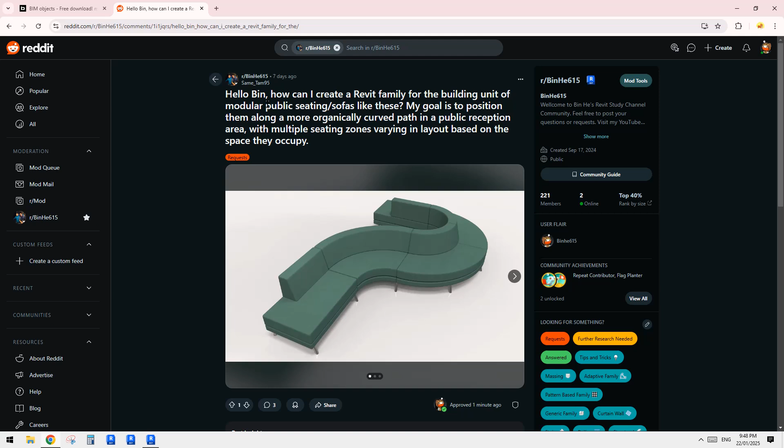So today we are going to have a look at how I can create a Revit family for the building modular.

Usually, I don't think we need to model these because you can always find this type of Revit file from manufacturers. Basically, I just did a quick search, so if you try to search for furniture and modular, you can find this type, and then you can just download them and put them together, and you will have this.

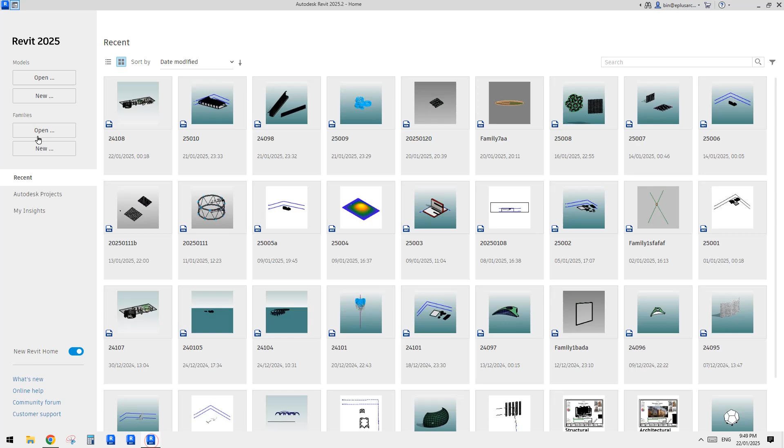It's also very easy to model, so I'll just very quickly show. What type of furniture, right?

I think you can either use a sweep, or I think we can just use sweep. For example, you can do a sweep, just do a sketch. Usually for those it looks like 45 degrees, because you can have two together become 90 degrees, four together become 180 degrees.

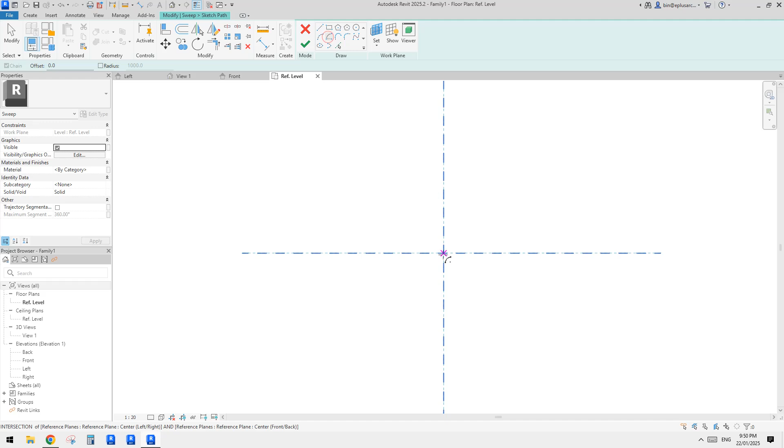So you can just do a center-ends arc, and then roughly get some dimension, 45 degrees, or just type in 45, and then finish, go edit profile.

So I just go to 3D view, and let's go to default 3D view. Let's rotate a little bit. Where am I? Where is it? I can't really see. Maybe I just go to front view. Okay, so that's the profile.

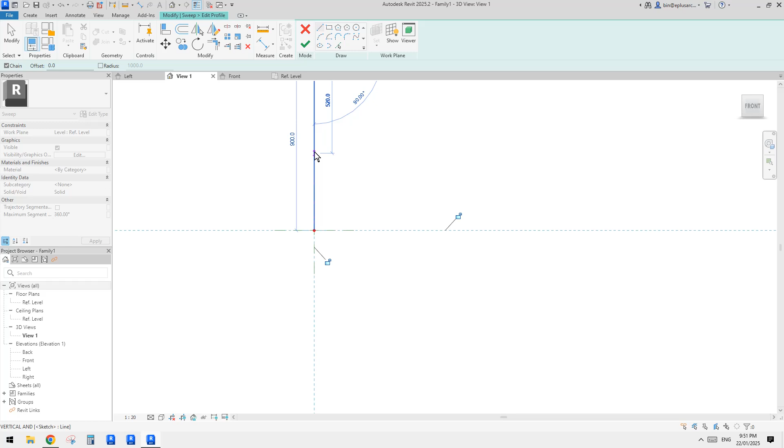And then you just draw something like 900, so I'll just do a very, very simple one. Maybe 450, 600, 700, 750, and then go up 450, go here maybe 600, go up something like this, so maybe I'll just make it 200.

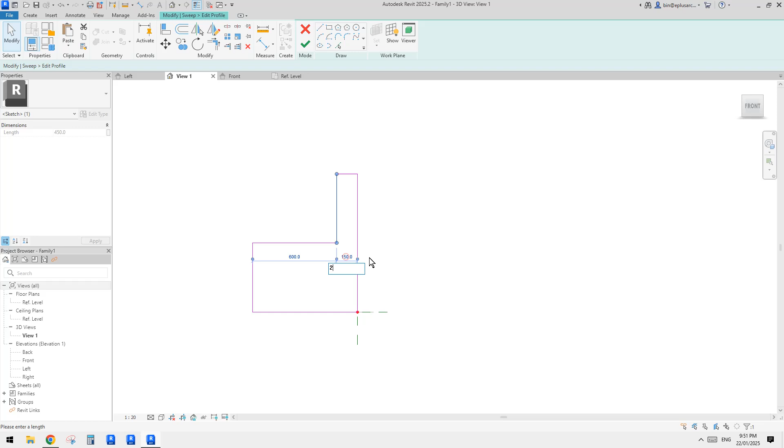And then you can always fillet all these corners, something like that. Don't worry too much about it.

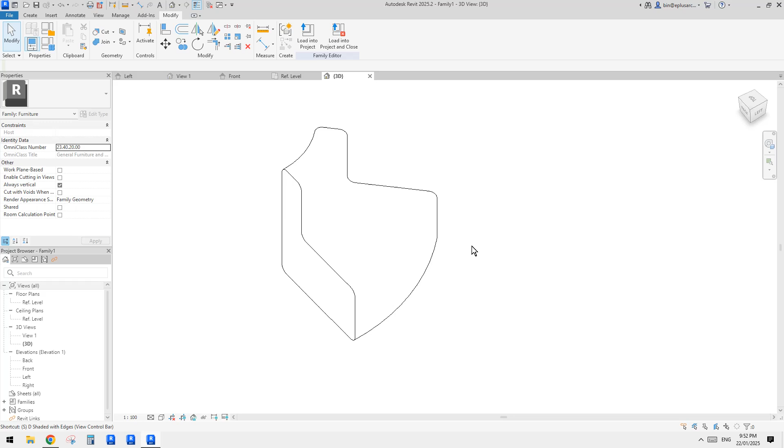Okay, and then let's go to 3D view, so we have one, right? And then you can do the same to the other direction. I'll change the shade. So this is one, and then you can also give different materials, so you can place them together to create something like this.

So this is one of the options, but I will probably not model them. I will try to find a product somewhere, download them, put them together, so we can create some nice seating layout.

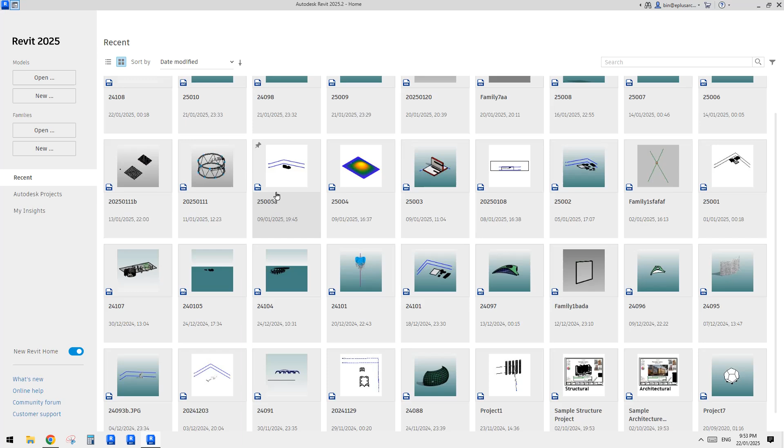But what I'm going to talk about today is, what if the shape is more complicated than this, like a very organic curve? We can create a family to place the whole set just by clicking 1, 2, 3, 4, maybe 5 few points, and that's all we need to do.

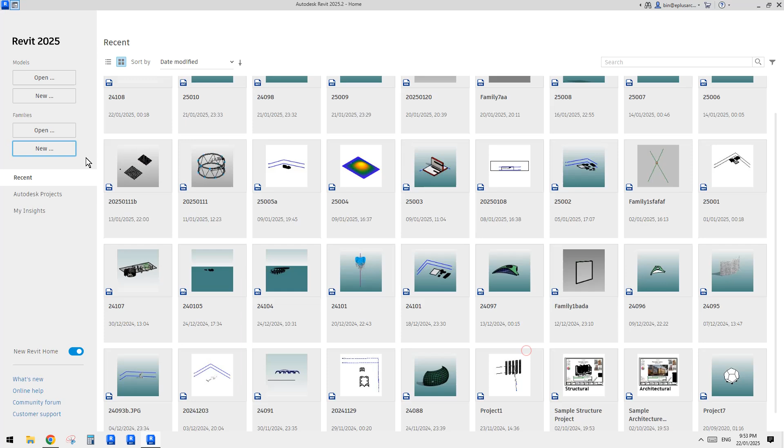So to do that, we need to create an adaptive family. Let's just quickly do it. For this one, maybe I'll just place 4 points and make adaptive. You can have more if you want, or the minimum is 3.

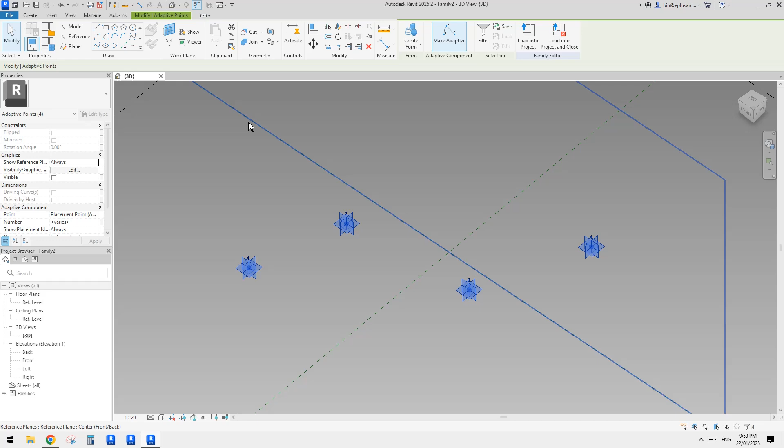You can also have 2, but if you want a straight line. Usually you need more if you want some interesting shape. So this will be the spline through points, and then let's make it adaptive.

And then we need to just use divided path. With this one, instead of using a fixed number, we're going to use fixed distance, or maybe we should probably use maximum distance, because if I use fixed distance, there might be a smaller one at one end, which I don't think we want.

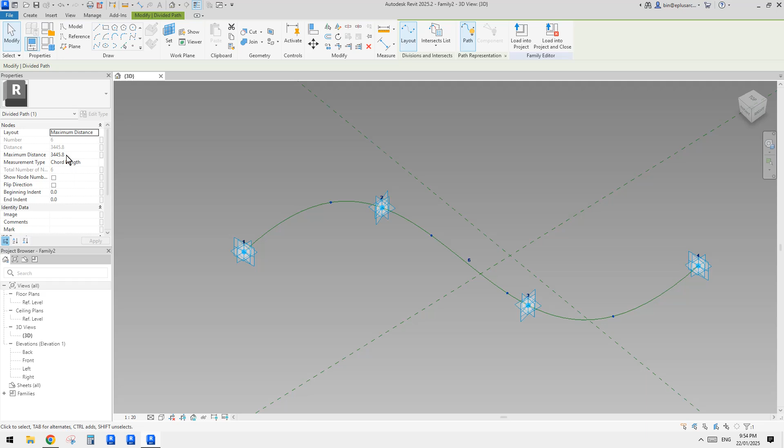So we're going to use maximum distance. Revit will automatically find a maximum distance, but we can also set this. For example, I'll just type in 900, and it will automatically place all these nodes and distances. You can either use a chord length, which is the direct distance from node to node, or use segment length, which is the length on this reference line.

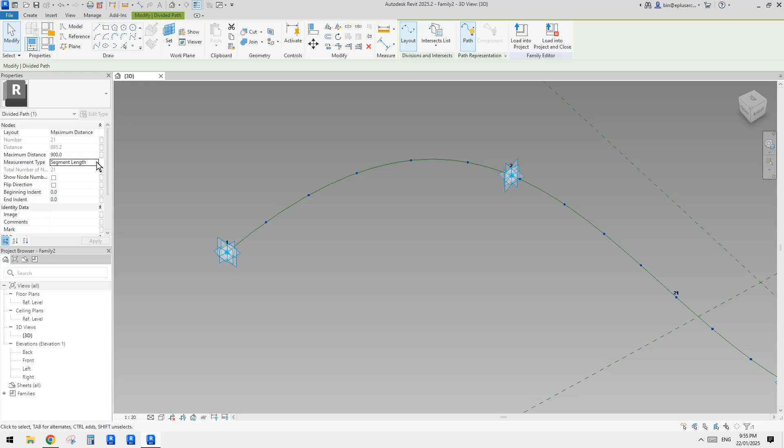Okay, so the length of this curved, so chord length is a straight line. So with this one, let me just move them together a little bit, so I don't want to make it too many. So now we have this, we have 9, and then we are going to create another adaptive family that will create something like this. Just one segment, and then we can place it onto this divided path.

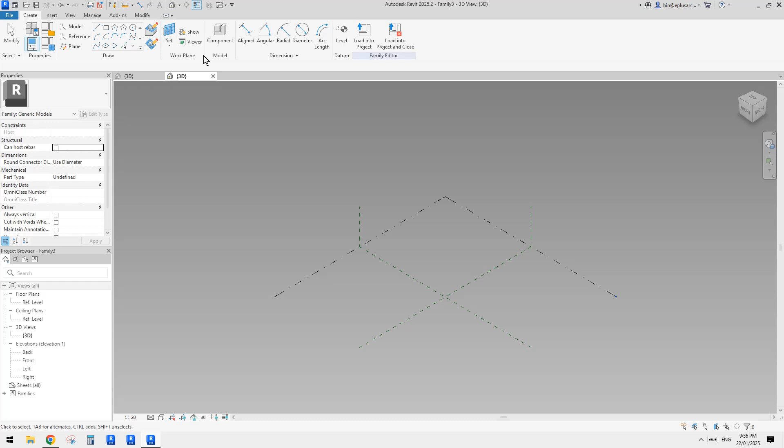Let's do another one, family, generic model, adaptive. In this one we need to place 2 adaptive points. Make them adaptive, create a spline through points, make it reference line, and then place a point, use draw on face onto this.

Now we need to set a gap. Imagine, when we place this family onto this divided surface, divided path, we want there to be a gap between. So for example, there's one here and another one here, so there needs to be a gap.

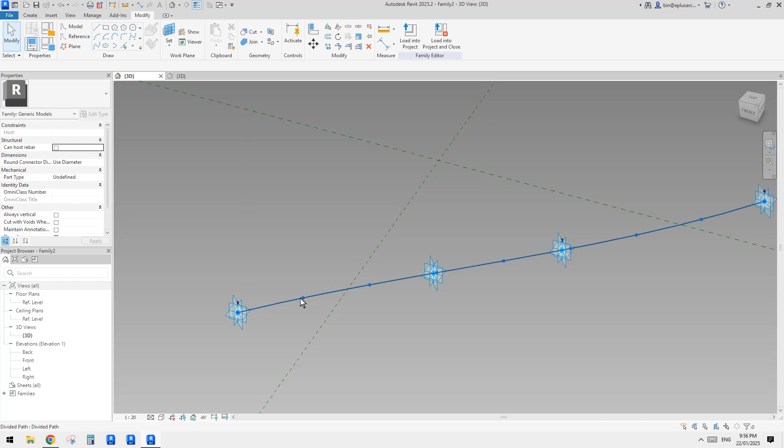So in this family, we need to place this point just close to this one, but let's use segment length for this one, and use this one. So this is the distance from here to here, the length of this line, but in this case, because it's a straight line, it doesn't matter, it's the same.

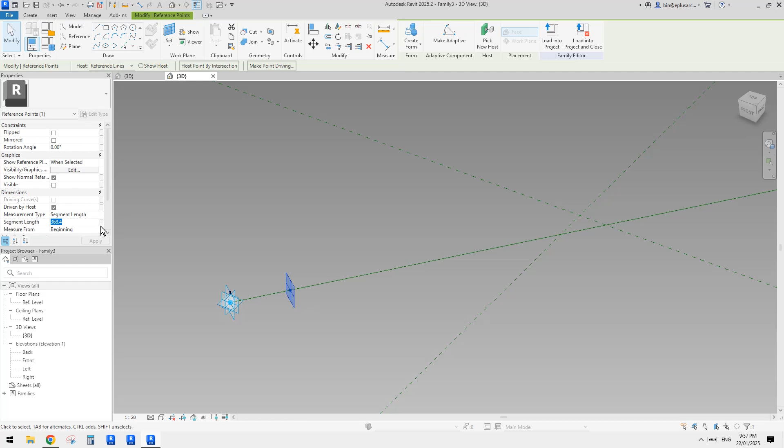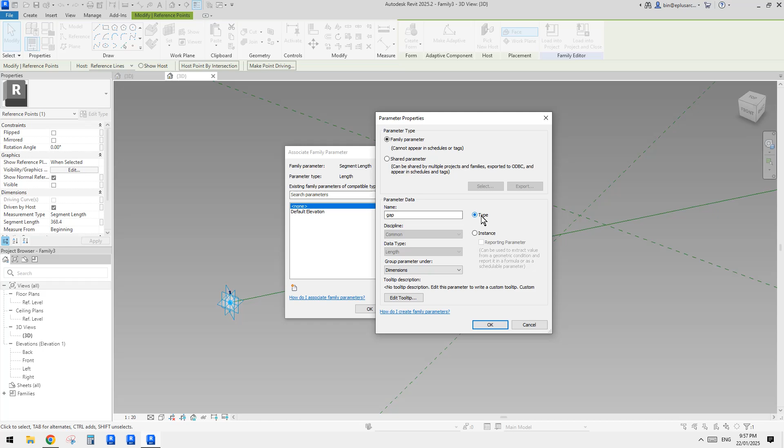So we can give it, we can actually control it, we can create a parameter. I'll just call it a gap. Actually it will be half of the gap, because we have one on this end, and then when we place another family on the other end, it will be another. But I'll just call it gap, doesn't really matter too much.

So I'll just type, it will be fine. So we can control this one. Let's say maybe 20 mil gap, or maybe 10 mil gap. Apply. So this point will be placed at 10 mil from that point. Maybe I'll also move this closer to here, and maybe change the scale to just leave it.

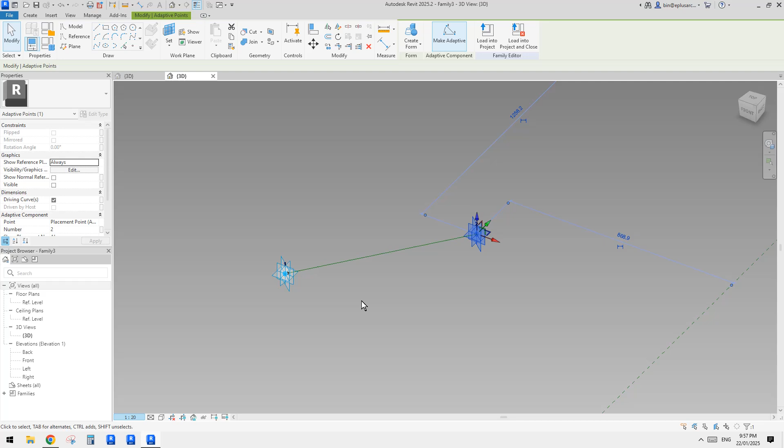So we have this one here, and I'll just place another one. I'll copy the point, pick new host, or you can just directly place another point to draw on face. Again, this one flip measures from this end, change this one to segment length, or use the same parameter. Let's use that gap. So now we have these two.

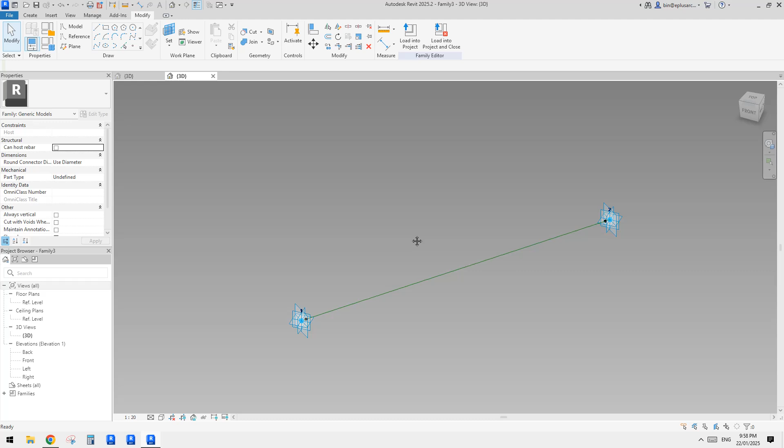Actually, maybe it's easier to delete this one, because once we create a profile, we can copy it, so we don't need to create the profiles twice. So let's now create a profile.

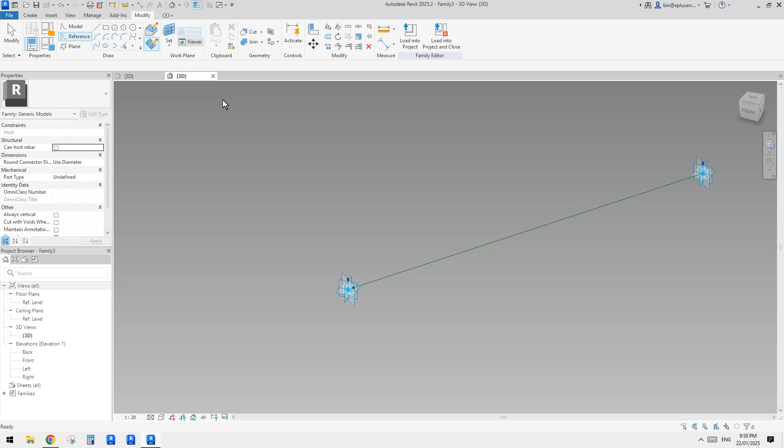For this one, let's use reference line, use draw on work plane, set work plane, pick this vertical work plane on this point. Now this is up to you. You can draw this profile centered to this point, or you can use this point as the back, or use the front as a front. But for this one, I'll probably just use this as a center point.

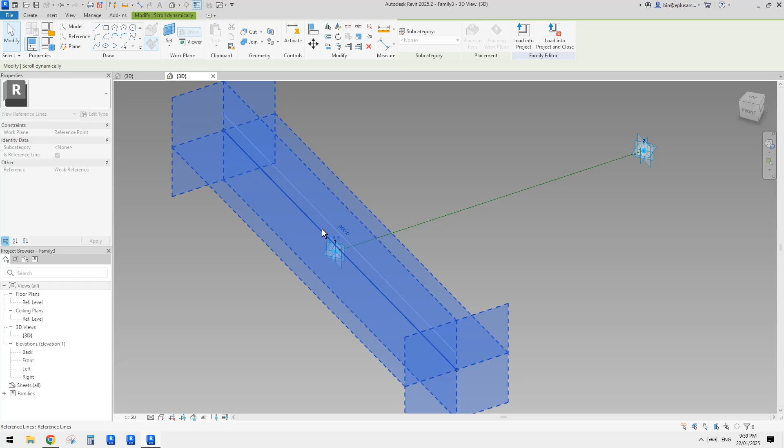Okay, I guess I'll just type 450 here. Now we have this line, right? I'll just make a reference line, and drag this and type in 900. So now we have a 900 line, reference line on this point, and then we can just continue.

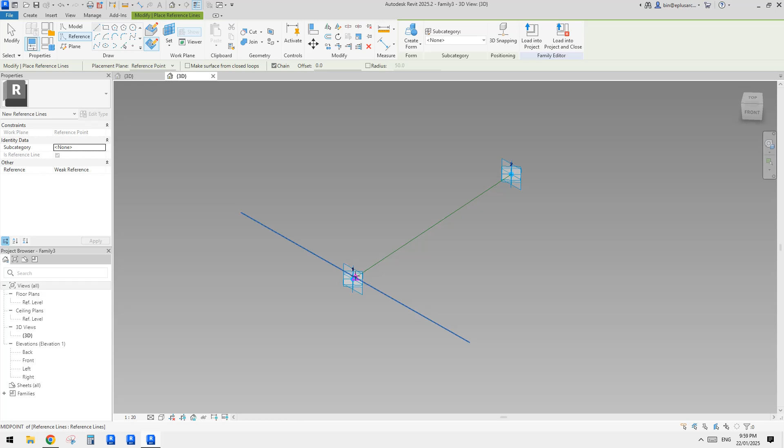Maybe I'll just draw this up, actually I'll just directly use reference line, draw this up, and also set work plane onto the point, because I try to place all the reference lines onto the same work plane, so it will be easier for us to select all the reference lines.

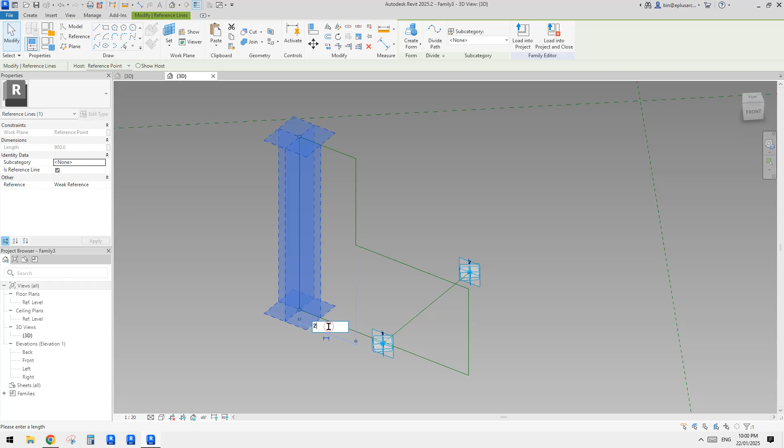Go up maybe 450, go this way maybe 907, maybe 600. So we have a very big back. 450 again, and 300, and down to here, and then we can do it, a little bit, yeah, that's fine. Maybe make it slightly smaller, 200. How about that? 200. And then maybe I'll just still want it to be centered. I'll just move it back by 50.

Now we can go use fillet arc. You can see it doesn't work when I try to pick line. This is because currently it's using model line. So if we use reference line, we should be able to pick it. Still doesn't work. The current placement plane is on one of the reference lines, I'm not sure which one, so I'll just use set work plane, onto the point.

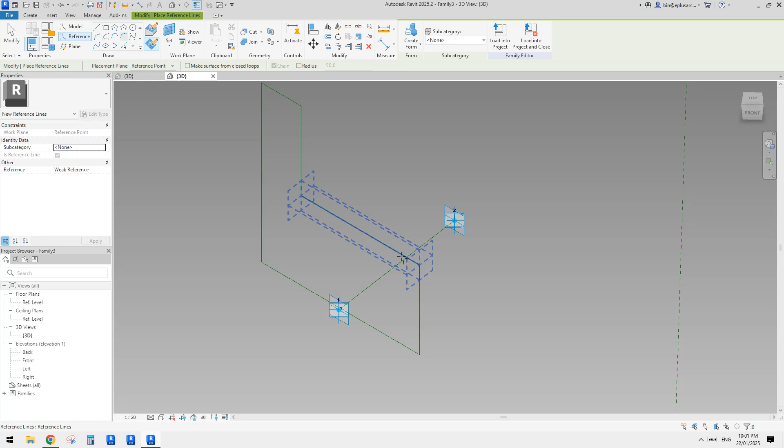So we placed all these reference lines previously. Now, see, now we can pick the reference lines, because the current work placement plane is the same as the work plane of these reference lines. This is quite important. So now let's just take this radius 50.

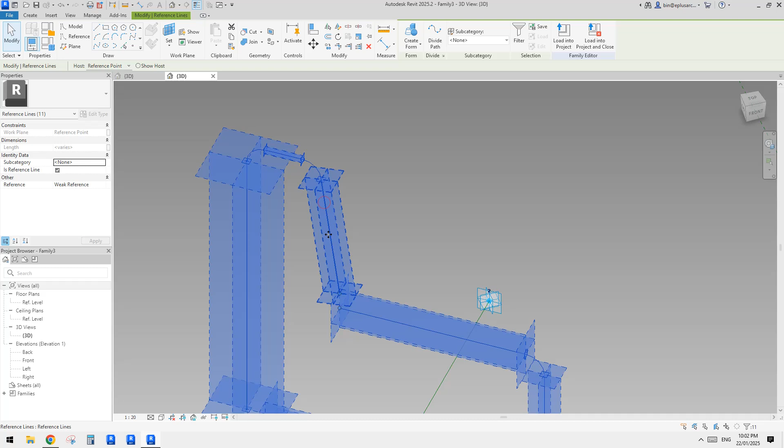You can change it if you want, and you can also adjust the lines. For example, I want this one to be a little bit slanted, so I'll delete this one. So the angle is on the back. We can also do that.

Again, we can just go pick the reference. It looks like it picks some reference line again, so we need to fix that. Okay, 50. Good. So now we have this profile.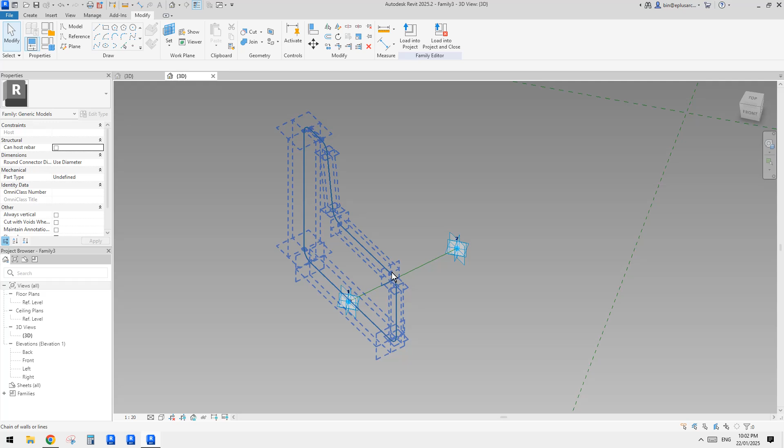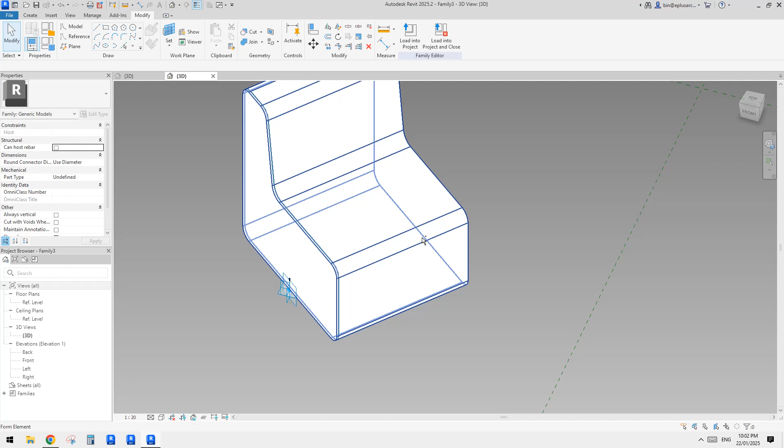And then, let me think, we need 3 instead of 2, because if we only have 2, it will be straight. If I create something with only 2 points it's always straight, but in this family it can be curved. So imagine when we place 1, 2, 3, 4, this segment should be curved.

So we will need another point. Instead of creating another reference line, we can just directly place a point onto this reference line. Doesn't matter where you place it, just use draw on face onto this reference line, and then use make point driving. Then we can use make adaptive and change this point number to 2, so when we place this one, it will be 1, 2, 3, not 1, 3, 2.

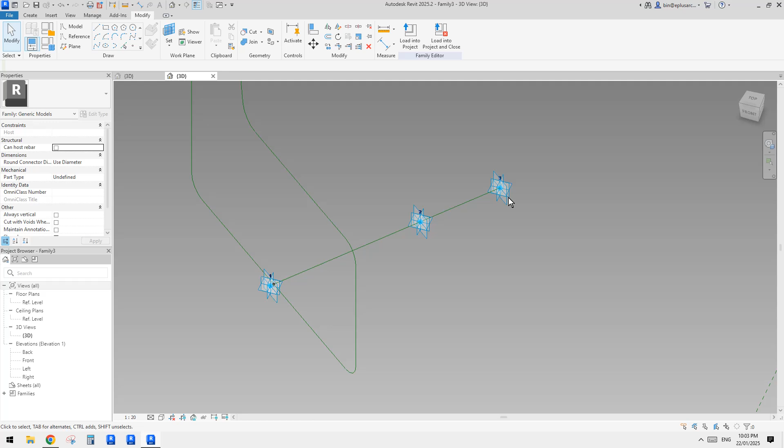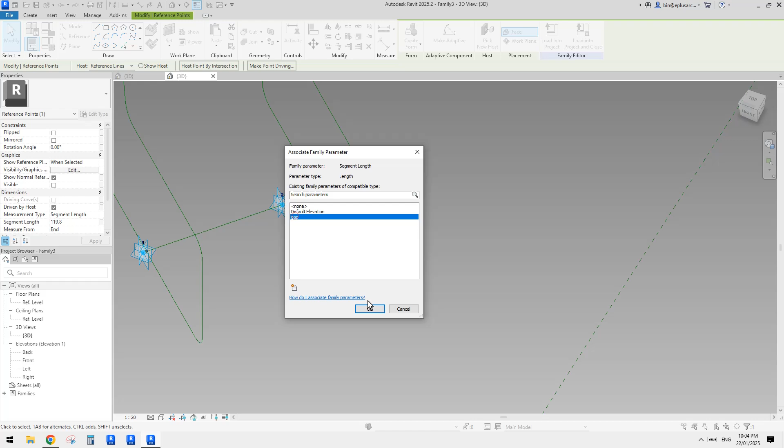So now we have this profile. I'll select this point, then control-select this profile curve, and select this point, use pick new host, place onto this reference line, select this point, flip it, and link. Change this one to segment length, link this one to gap. Now select this, and very important, you also need to select the path, otherwise you won't be able to create a curved shape.

So let's create a form. Now you can see it looks straight, but actually, if I move this point, you will see it become curved, right? So now this is it.

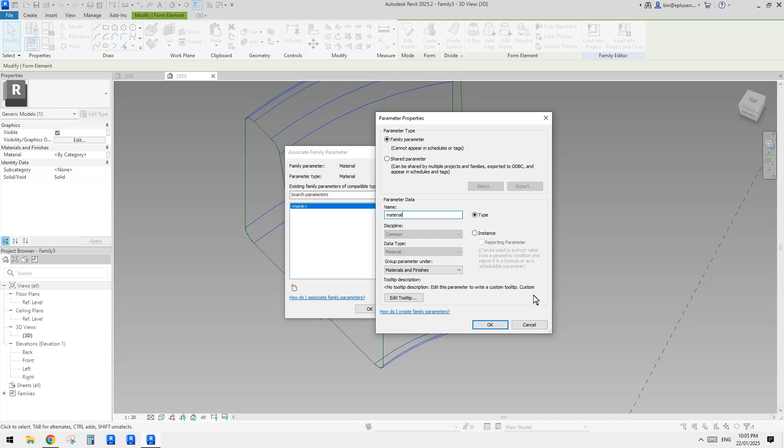And then we can also create a material in case we need to change the material. So... yeah, probably not, because we will have a repeater, and I don't think we can have an instance parameter to have different material. Anyway, let's just leave it, or maybe cancel this one. I'll leave it.

Load this one into here, so let's just place one. Now, because we have 3 adaptive points, instead of having 900, we might need to reduce this a little bit.

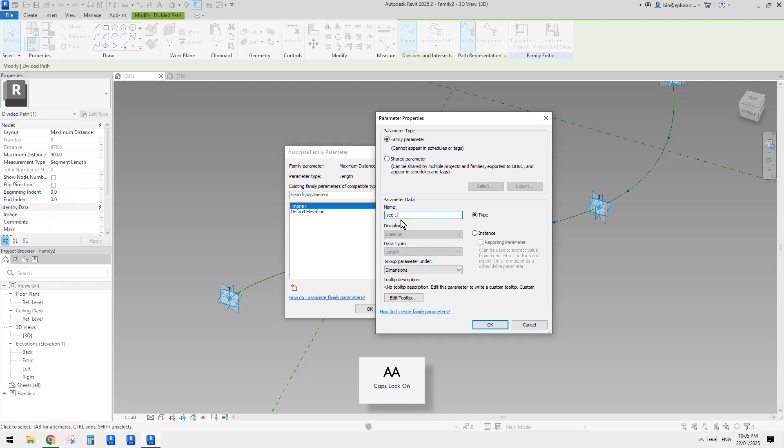So I'll also create a parameter, maybe call it segment length, with a capital L, and maybe an instance parameter. Now we're going to change this one to maybe 450, so I know that when I place one of this, it will be maximum 900.

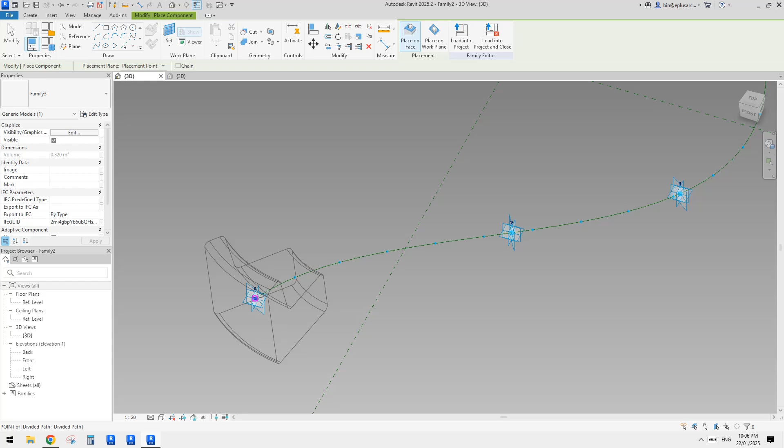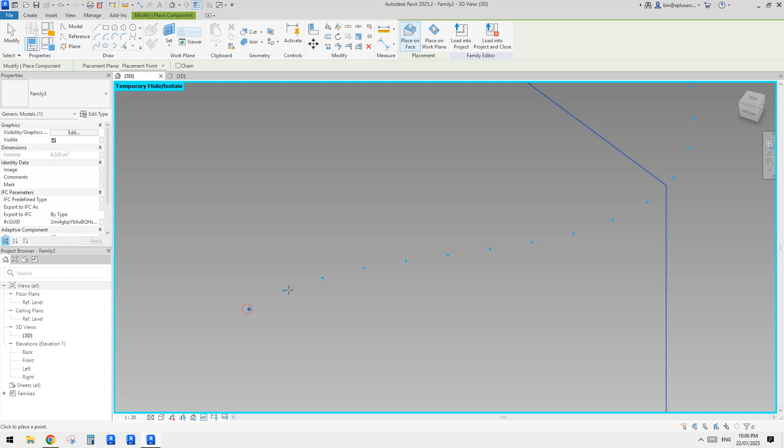Okay, now load this one, and let's place it. I'm not really sure about the points here. Sometimes to avoid accidentally placing onto the adaptive point instead of onto these nodes, you can select the divided path, select, and type HI. Now there's nothing except this, so you won't place it onto something else other than these nodes. Now 1, 2, 3, and let's have a look.

So if I click on repeat... not quite right.

Yeah, not sure. Maybe we can just tick this always vertical. Let's have a look again. Override. No, not this one. Let me think.

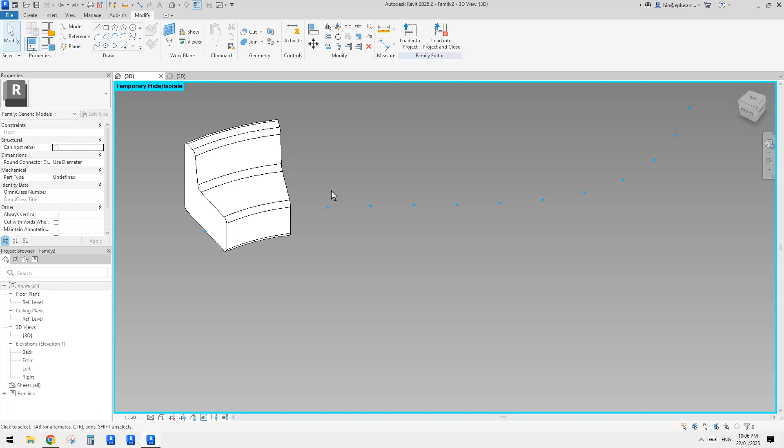Maybe let's try, instead of orient to, maybe I'll just use global. Let's try this. Load this one, override, select it, repeat. No, still not right. So maybe I'll change this one back to

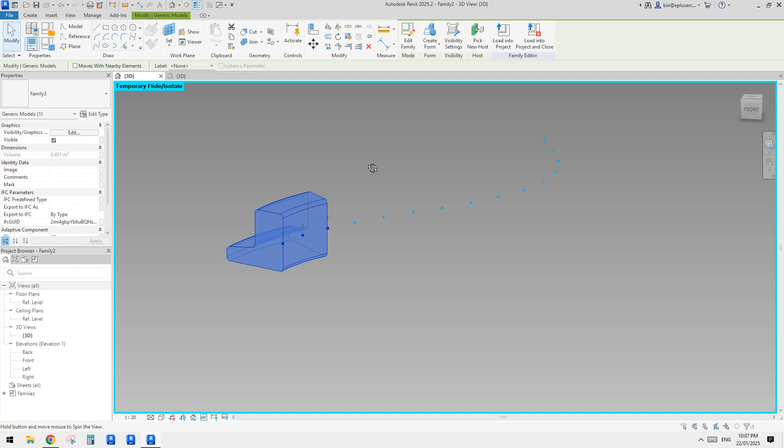How about change to host? And also I'll untick the always vertical. Load it back, override. Ooh, looks like maybe we need always vertical. I don't know. Override. No, still not right.

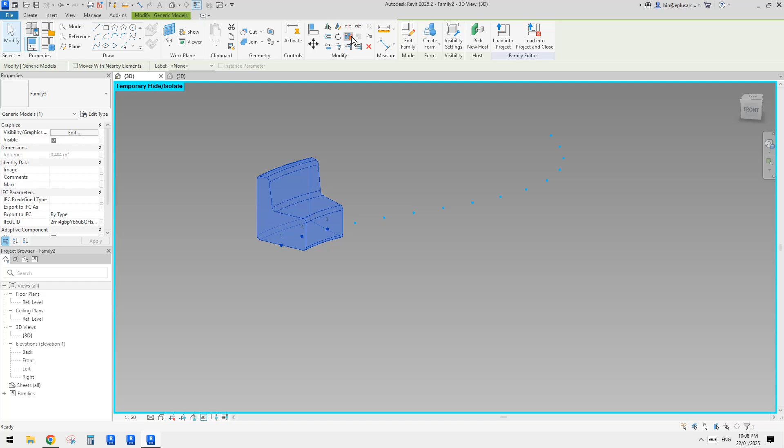Let me think. Maybe change this back to instance. Still have the always vertical. Let's try again. Override. Repeat. This is a little bit tricky.

Yeah, this is a little bit tricky. Don't give up. Okay, so don't give up, it will work.

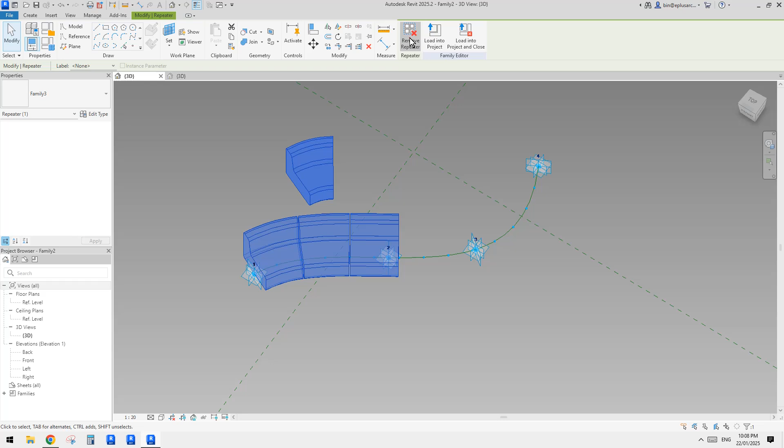So let's have a look. Okay, one is here, but it's being placed there. This one's fine, this one's fine, this one's not right. How about this one? This one's not right as well. So how about I move this a little bit? Sometimes this might fix it. Still no.

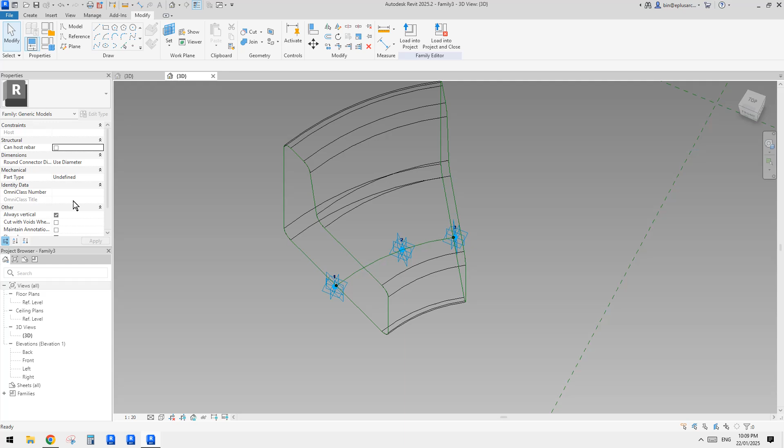Go back. Let's have a look. Everything's fine. Instance unchecked, always vertical. Load it back, overwrite, select it, repeat. Okay. How do we fix this?

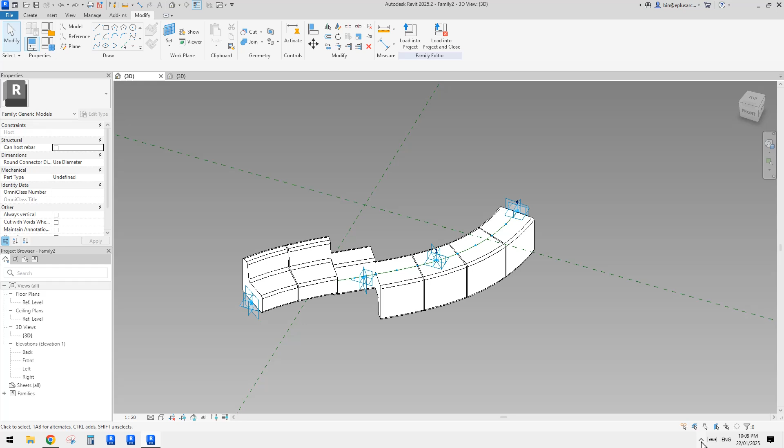I don't think we need to do flip, right? So no. Okay, so give me a few minutes. I'll figure this out.

Yeah, I figured it out. What I did is no always vertical, just change this to global. Okay, global without always vertical, and then that's it. See? So now you can see there's one, and then there's a gap between.

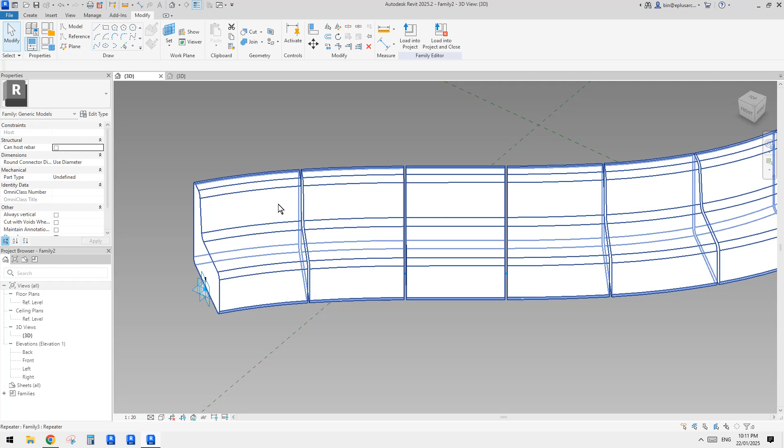So you can still, where's my gap? Here. So you can change this. You can just increase the gap if you want to, reduce the gap if you need to as well. So let's change this back to 10.

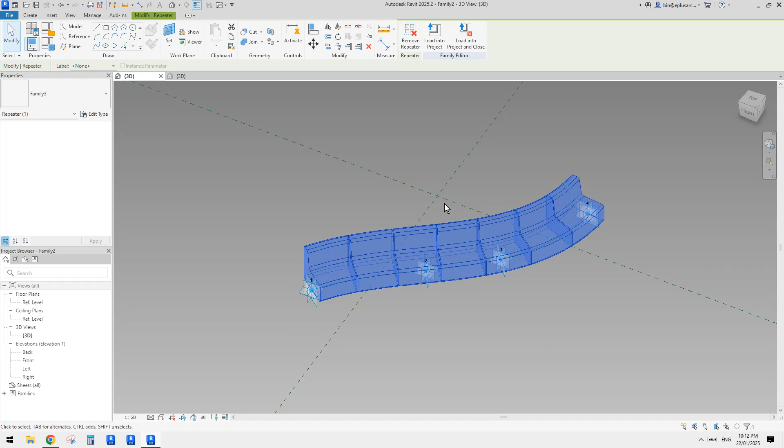Yeah, I don't think we can have a different color because it's a repeater. Unless you remove the repeater, and then it won't automatically increase the number when you increase the length. So yep.

So let's have a test. So if I go create a project, for example, I'll just use a non-template, and then load this one into this project.

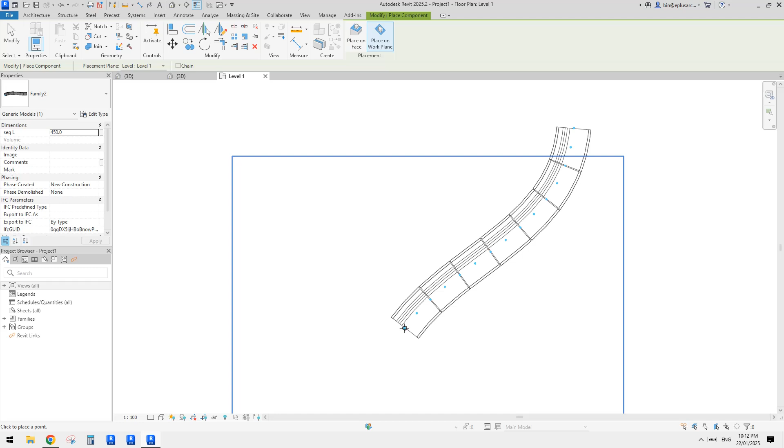I'll just use place on work plane, draw onto a level, so you can see. So this is the original shape, right? So 1, 2, 3, 4. When I place 4 points, it will create a shape, and then automatically place those set.

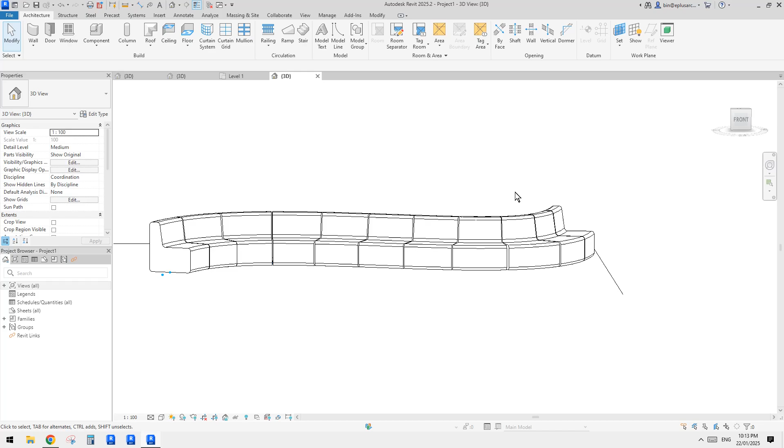So it looks like so along this path. Let's have a look in 3D view. Right, so I think it's quite good if you just want to have a shape, quickly just create something.

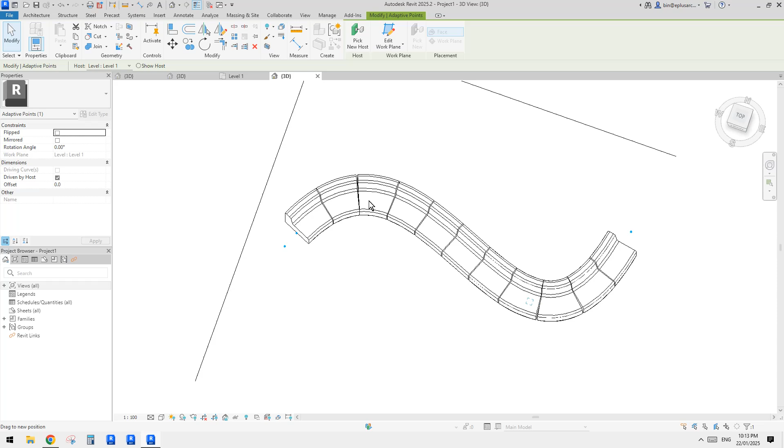You don't need to worry about placing all these families to match and create the shape. And you can always select one of the points, for example here, select it. I want this one to maybe move up, and create this instead of an S shape, right?

Right. Oh. Don't know what happened. Maybe we can flip it. I don't know. Yeah. Hang on.

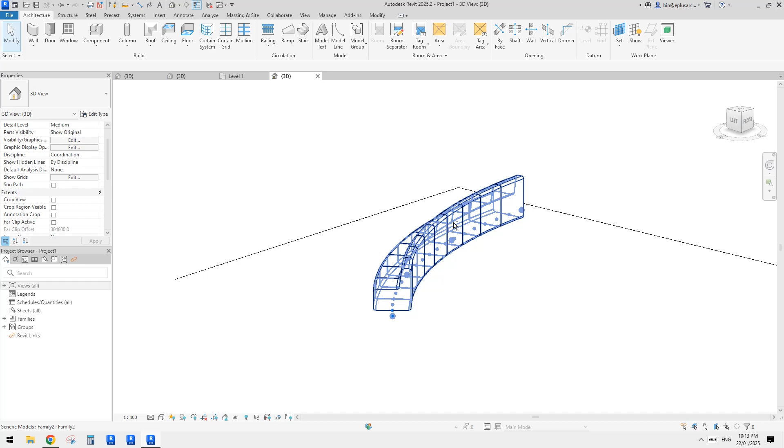Flip. Can we flip left and right instead of up? I don't know, I think I had this issue before. So instead, I'll have another look, but for this one, I think it's quite good.

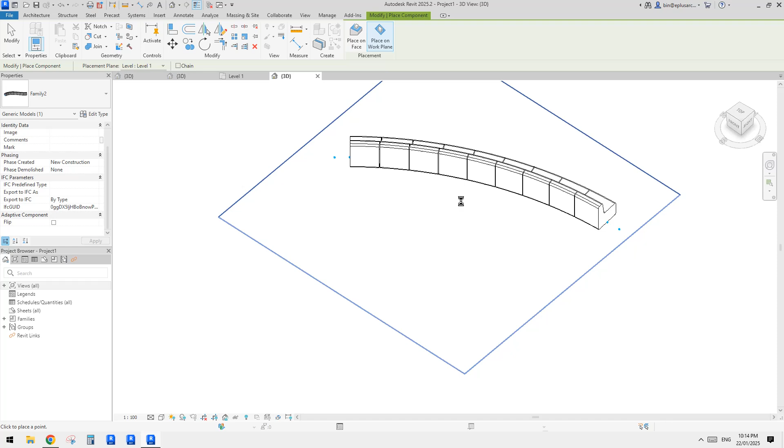I'll just do another one. So 1, 2, 3, 4, and I'll see if I can change the size of this individually. So currently it's 900, right? So 900 because we use 450 for half, and also because I used instance parameter, which is—where is it?

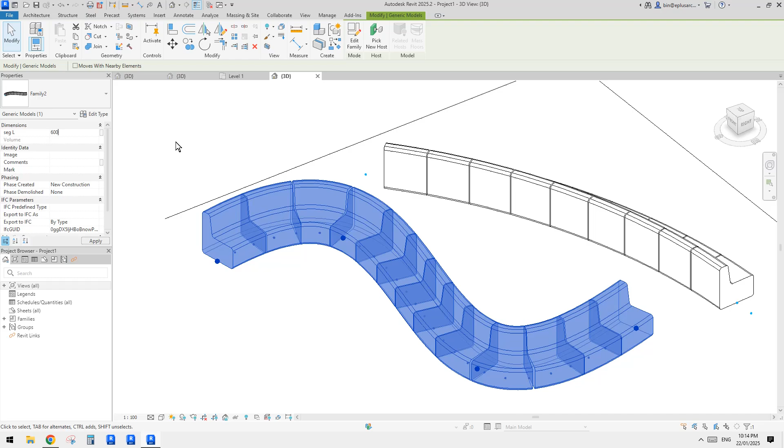Oh, here. Yeah, because we use instance parameter, we can change this one without affecting that one. So for example, I'll change this one to like 600. So this should reduce the number, right? So yeah, not perfect, but I think it's good enough.

Okay, so finally let's have a look and see if we can work out how to—because sometimes when we create this one, actually what we want is this to be facing the other side. How can we achieve that?

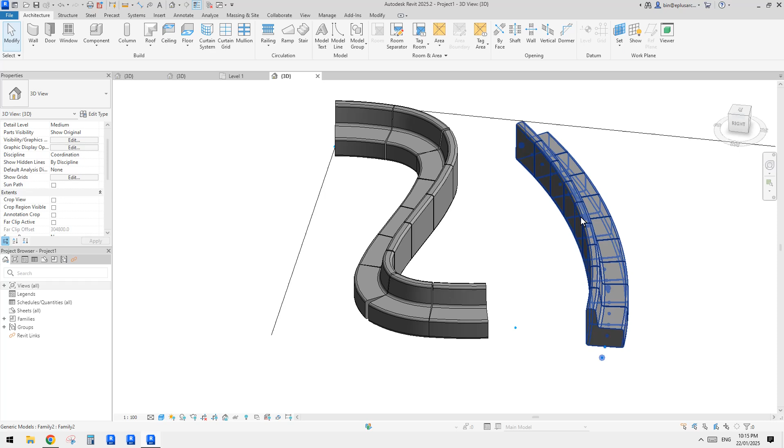Looks like this won't work, right? This will flip this upside down. So let's have a look on this one. See, upside down. Now this is not what we want.

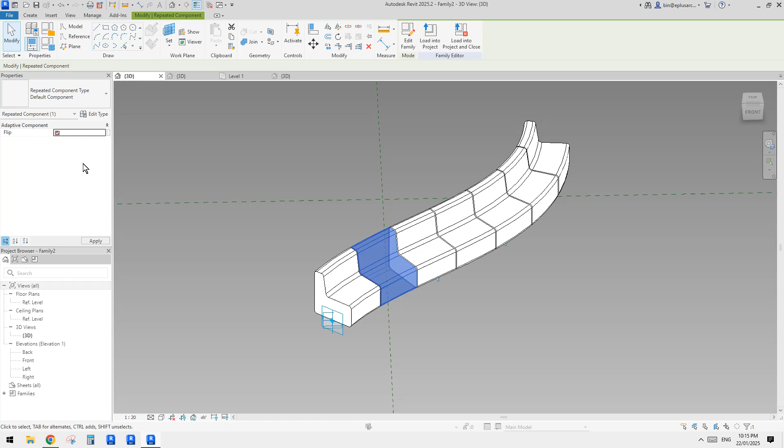So what we're going to do is I'll just go edit family. So in this one, let's have a look again. If I tab select one of this and click on the flip, see, it will flip to the other side. So this is what we need, right? So this is the flip we need.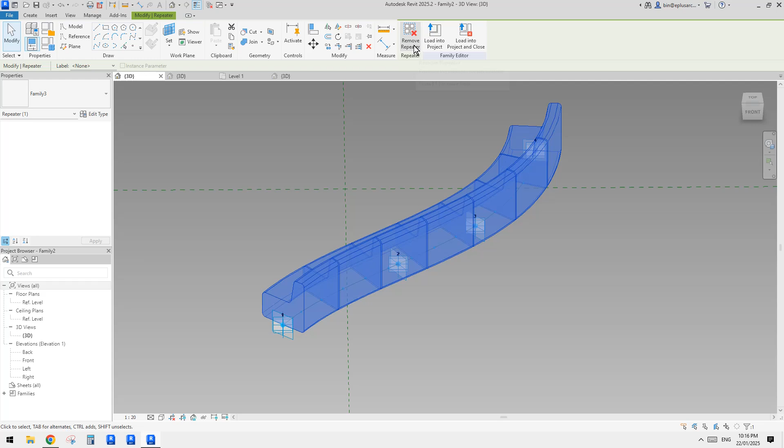So what we can do is we can just click on this. Let me do it again. So you won't be able to do it if you have this repeater on, right? So of course we keep the repeater. We need to tab select, so individual, right?

So now we have this flip. Go click on this, and now I'm going to just call it flip. Instance or type, I think it should be instance, right? So okay, now we can load this one into that project and overwrite.

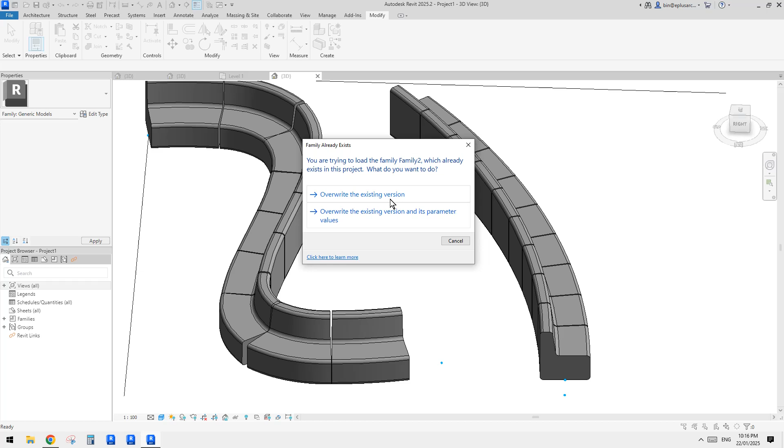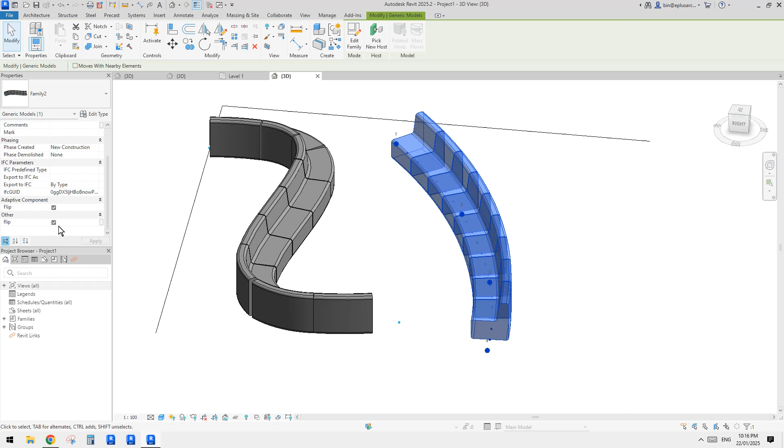And now we have the option. If you scroll down here, there are two. One is the default flip for adaptive component, which will flip upside down. But this is the one we created. So if I click on this, it will flip. It will be facing that way, right? Same if I change this one.

Okay, so yep, and this is it. Let's look here quickly. So if you don't want to see these nodes, one option is go to VV, turn on Mass, and untick nodes. So you can, and then yeah, don't worry about that.

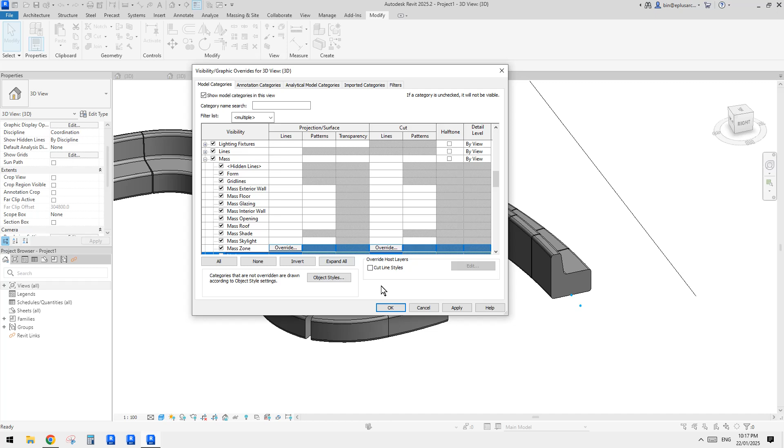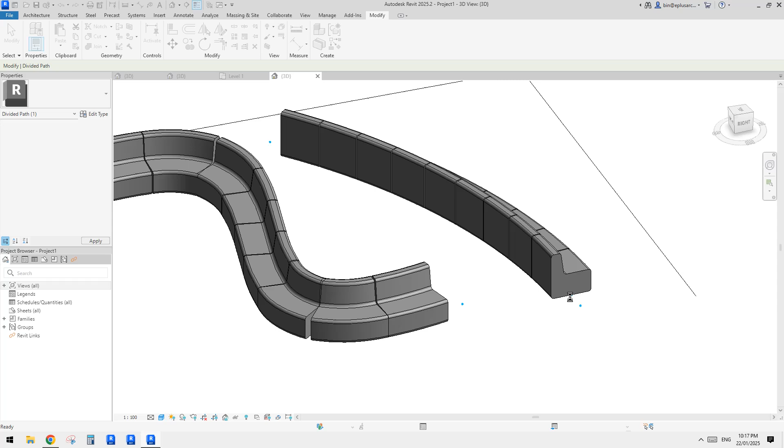So you can hide them, or Control Z, or you can just go back into this family, right? And then select this divided path, go here, and uncheck the nodes. So this will hide the nodes in project, so you won't be able to see them anymore, right? And yep, so this is it.

Still, if you want to change the shape, you just need to tab select the points, adaptive points. You can just change the location of that point. It will also change the shape of this. So yep, so this is it.

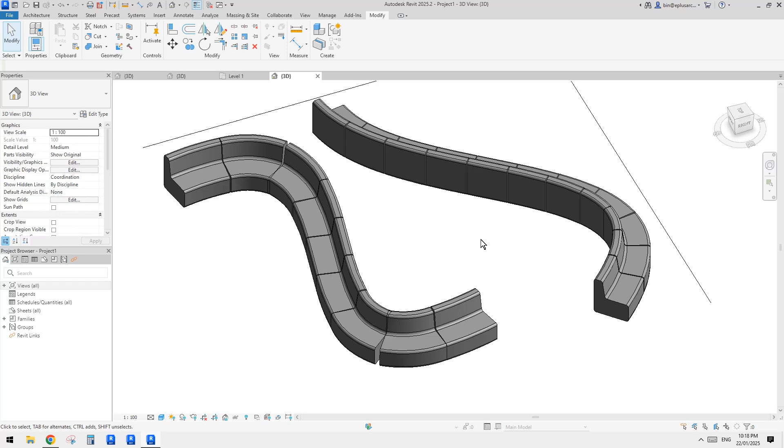A very simple adaptive family that - and again, so 1, 2, 3, 4, there are 4 adaptive points.

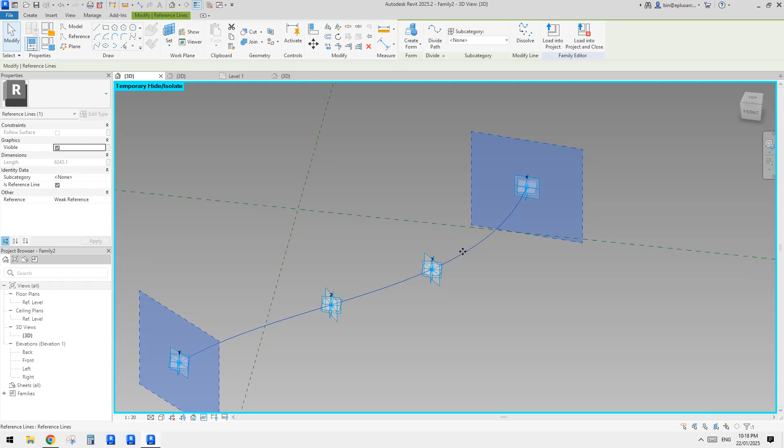If you want to, you can always go back here. So like if I just - you can do this. So hide the adaptive path, divided path, and now you can see this is a reference line. So you can just place a point, use draw on face, and just place a point anywhere onto this reference line.

Okay, and then select this point and make point driving. So now you have, again, you need to make this point adaptive. Now you have 5, and also probably better change this number to 4. So we have 5 at the end.

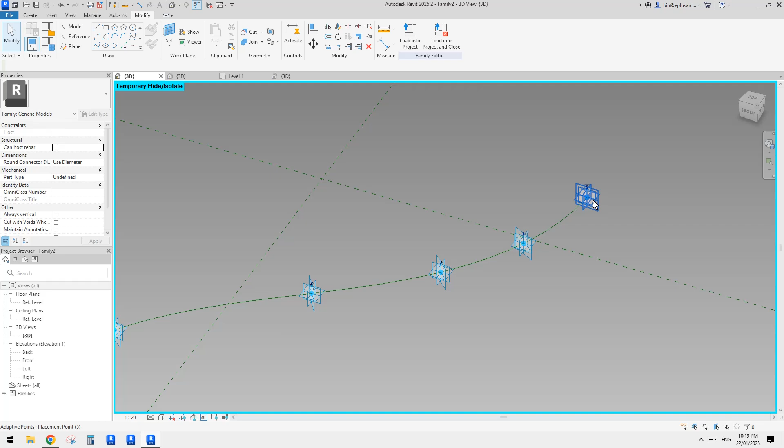Now we can load this one back into the project. And I'm not sure if this might break these 2 families because we have one more point. And depending on where that point lands, looks like 5. So now you can see it's 5 - 1, 2, 3, 4, 5, right?

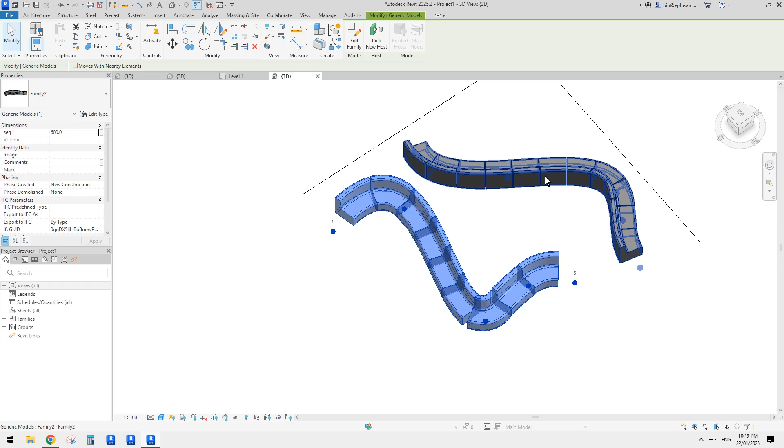So yeah, you can have more if you wanted to. Okay, so this is it. I'll just drag this to here. So create, maybe this one needs to go down here a little bit.

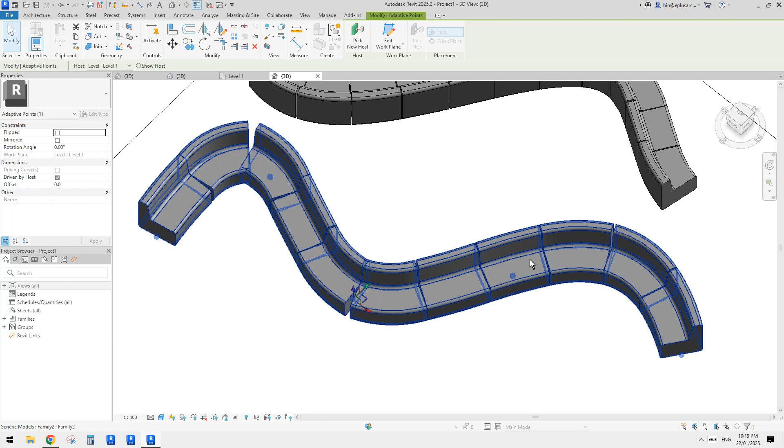Because try to avoid this corner, so it breaks a little bit. Also here, it's not perfect, but if you try to make this more smooth, not those sharp corners, it works slightly better. Yeah, I think, yeah, so this is it.